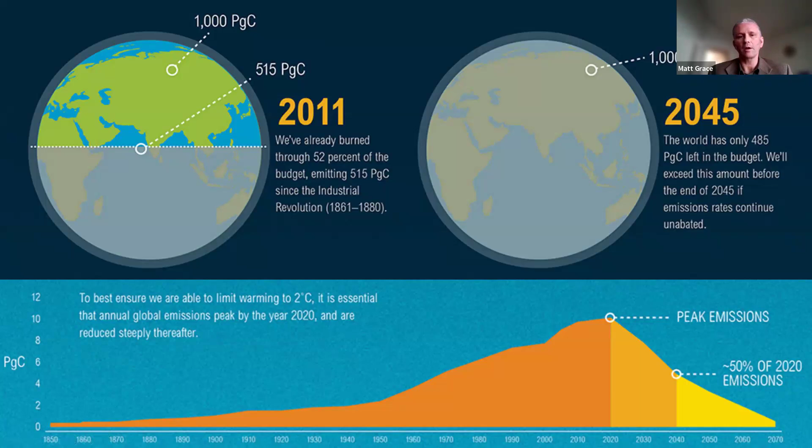Any questions at that point? All right, none so far. Carry on. I'm carrying on.

All right, so hopefully we've now got consensus that we know the common language of sustainability and where that came from. And we just had a refresher on the state of the problem and the need to take action on reducing emissions. But how significant is our industry?

How significant is the construction industry? I did a talk for the International Architects Association a couple of years ago, and I actually started looking into the number of buildings that we have in the world. What we see from this graph, dating back from 2019 — and it was surprisingly difficult to find global figures for this information — is that our floor area has gone up year on year.

We had a little dip there when emissions leveled, but now they've started creeping up again. So the contribution of the built environment is not going down, and the rate of change we're getting from regulatory changes, from new building codes, is a fraction of what we need to do.

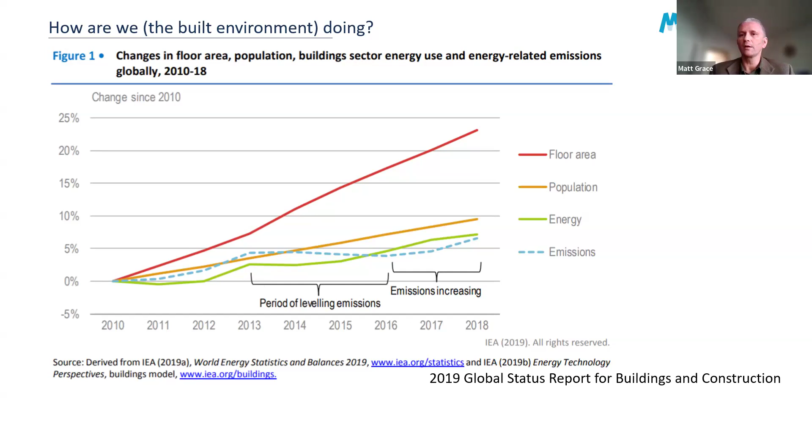So as part of this talk I did on existing buildings — I'm expecting Andrea might be interested in this as well — the best estimate I could come up with was that there were around 1.7 billion buildings in the world. And that was from a little survey they did of just a small proportion. So we've got a huge challenge, and we're very focused on reducing emissions in new buildings. We can't do it without tackling the existing buildings.

Also, when we look a bit closer to home in terms of Canada, what we build now, we're going to be stuck with. So we're not going to build our way out of this by doing new buildings. Around about half of all the buildings that we have will still be in use by 2050. So we'd better do what we can with those. And we're also seeing that we're only replacing the building stock by, at best, 1% a year. So the role of the existing building stock is very, very significant here.

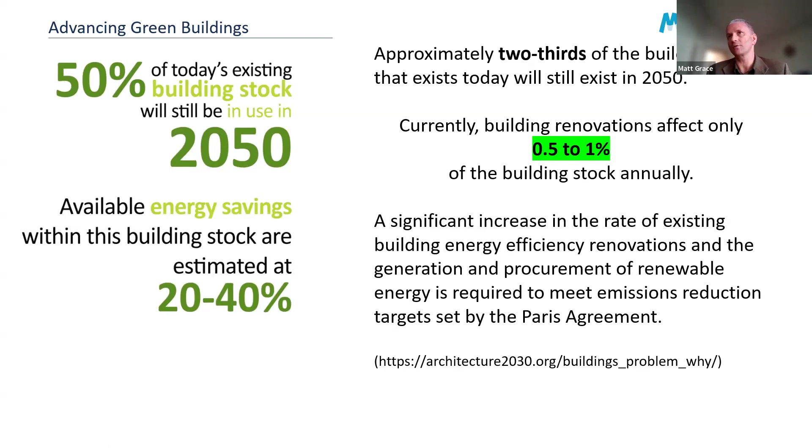I'm also interested in the global piece of the energy and emissions pie of our building sector. This next graph is fairly complicated, but I borrowed it from an energy guru I found through LinkedIn. It might be tricky to read, but I've started to really appreciate Sankey diagrams.

Am I marking this up or not? Let me annotate. Here we go. Yeah, we can see your mouse.

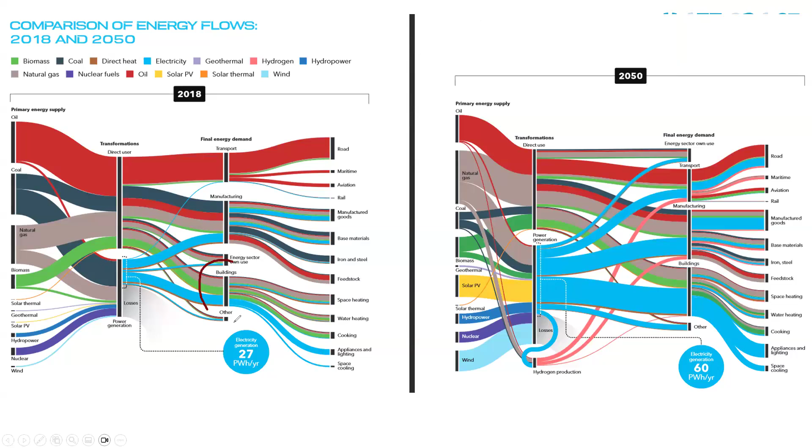This chunk down here is buildings, for 2018. We're seeing that total electrical generation is going to more than double, and the buildings' role is still huge. I've seen estimates globally of the energy and emissions associated with buildings ranging anywhere between 30% and 60%. You could argue it's much higher, because where we choose to locate our buildings and the transportation infrastructure between them impacts the whole transportation section as well. And a lot of the materials we manufacture are for building and maintaining buildings, so I could claim a big chunk of that too for the built environment. I think the role of the built environment is usually understated when you consider the number of different end uses it impacts.

If we're renovating or designing buildings using materials that have to be transported across the world, the transportation impact is going to be significant.

One of the other facts, as an aside - I've been aware of this for a while regarding maritime transportation, but I've seen it circulating recently on social media: around 40% of all ocean-going vessels are transporting fossil fuels. It's a really bizarre system that we're in right now.

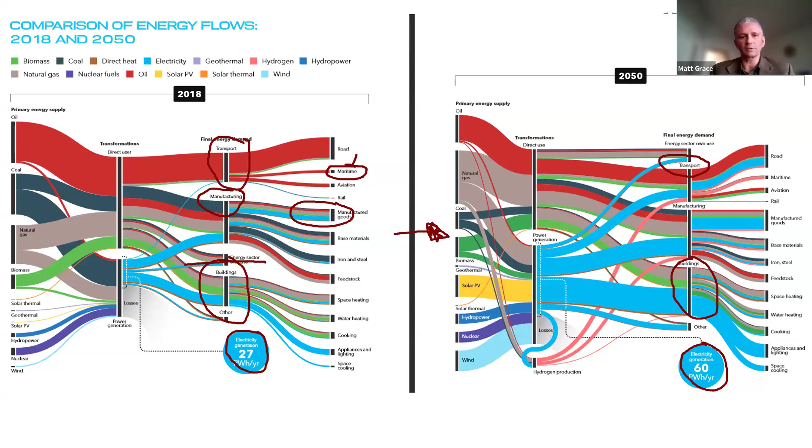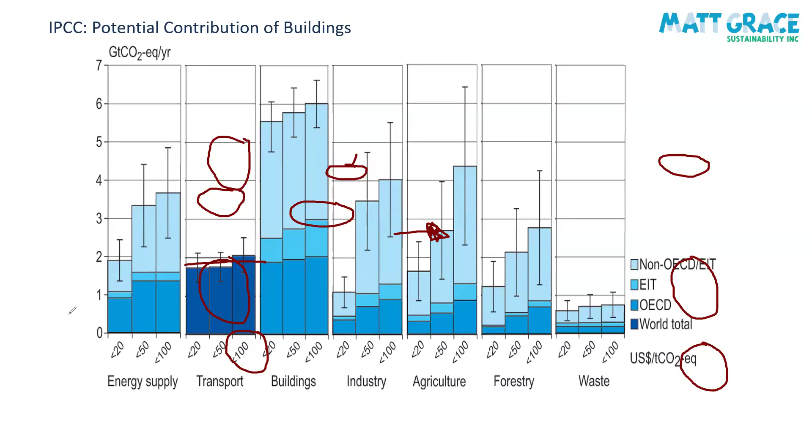The other source I like to reference - oops, how do I get rid of these annotations? Hit the clear annotate button on the annotate bar. Do I just hit that? Oh, there you go, delete all those comments. Look at that. Learning on the job here.

Thanks, Frank. I love this graph because it's not from buildings people. What we have here is global emissions, measured in gigatons of CO2 equivalent per year. I wouldn't worry too much about the different shades on the graph, but what we see is that we're the biggest - so we're number one. Everyone, round of applause there.

So if we did everything else and ignored buildings, just from this graph I think I'm going to claim a chunk of this for us, and probably a chunk of this waste as well, plus materials, which isn't even showing up on this graph. But every way you look, every independent study, buildings is the biggest chunk, the biggest opportunity for savings, and the biggest impact when you take one particular sector. I find it kind of empowering, a little bit intimidating, but it also reinforces our call to arms to tackle this.

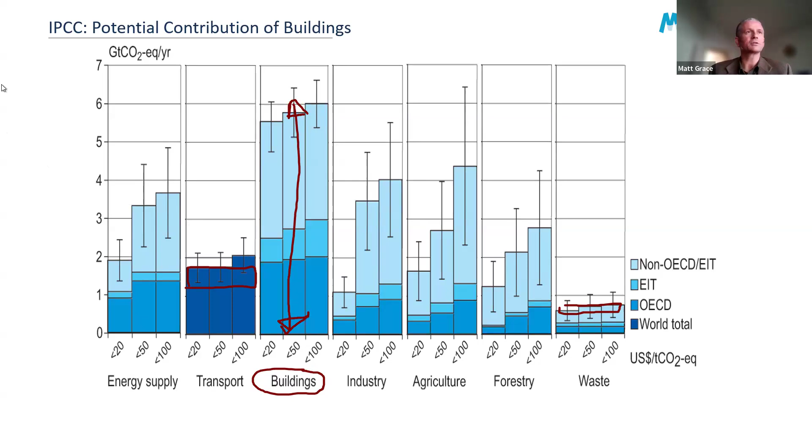Any questions at this point? Okay.

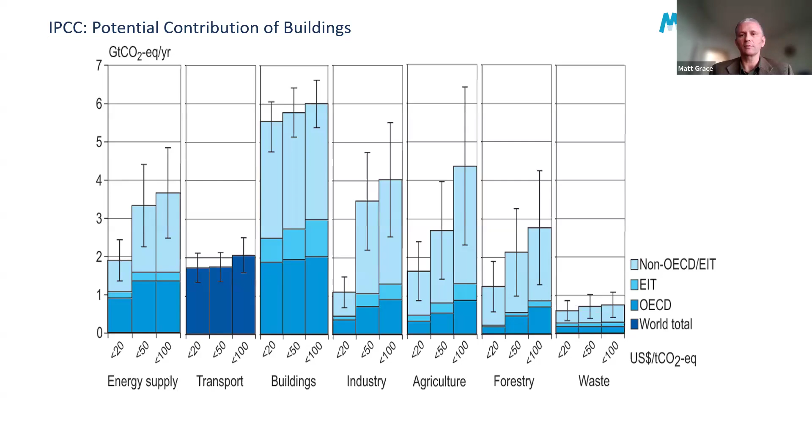All right, so hopefully by now we all agree on a common language of sustainability. We know we've got a big problem - we probably knew that already. We know we have to act in terms of the construction industry. And how do we know if we have a sustainable building?

Let's have a look at that. This is really where all of the frameworks for sustainability, using that term broadly, started - beginning with BREEAM back in the UK. Dave and I both worked with the original authors of BREEAM, and they started to say let's have a global approach to this and try to have a simple framework for what we mean by sustainability in terms of a building.

Can anybody tell me what this graph is showing?

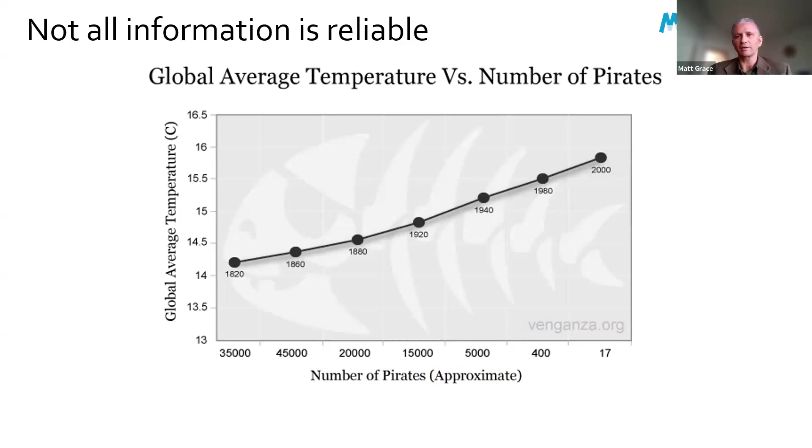I did have a meeting this morning talking about affordable housing. We'll maybe touch on affordable housing here in Calgary. Lee, who I was meeting, said, 'Is that my Hummer outside?' Was it a bit of a joke? It wasn't. I don't have a Hummer.

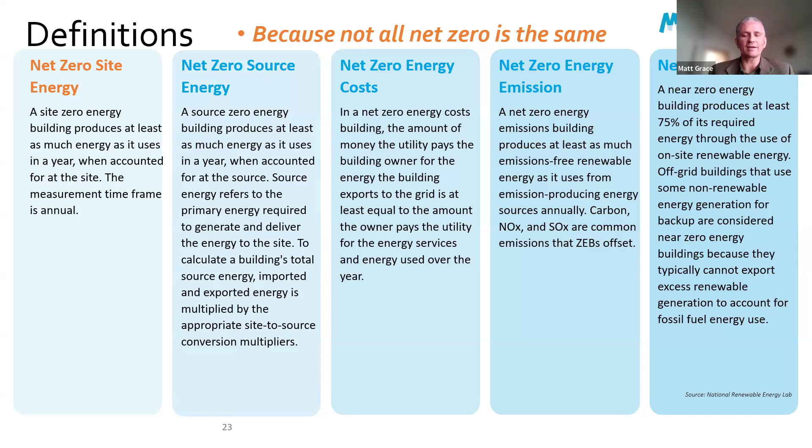Let's start to have buildings that actually contribute more clean energy than they use, that take materials out of landfill or divert them from landfill, that include workforce and labor opportunities for people who might not get them otherwise, and that contribute to clean water as well. All of this is possible. None of the problems we have, the challenges, are technical. We know how to do all of these things.

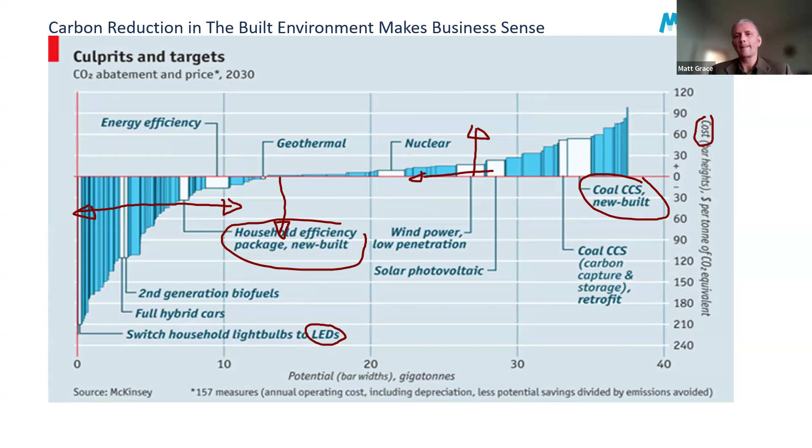A couple of years ago, a colleague and I did a study specifically for Alberta, looking at a few different archetypes. What we found, for net zero, was there was somewhere in the range of a 5 to 10% premium.

The most common pitfall is that when a design team is asked to move towards net zero or net positive, they usually pick out the design they did last time and build from there. A few years back, I had a client who'd moved from the automotive industry into buildings, and after working with him for a few months, he told me the building industry is really backwards, really slow.

When you design a new vehicle, they typically set out all the operating parameters and design performance first - say, carry 5 people and this amount of luggage, go this distance at this speed, with these crash safety ratings. Then the design team designs the car to meet those requirements. He could not believe the practice we typically go through in construction.

He said everyone's pulling out the last thing they did and trying to modify it - basically pulling out a minivan, a soccer mom's minivan, and adding upgrades to try to make it into a Formula One car. He said it's never going to work because you're always adding things but never taking something out.

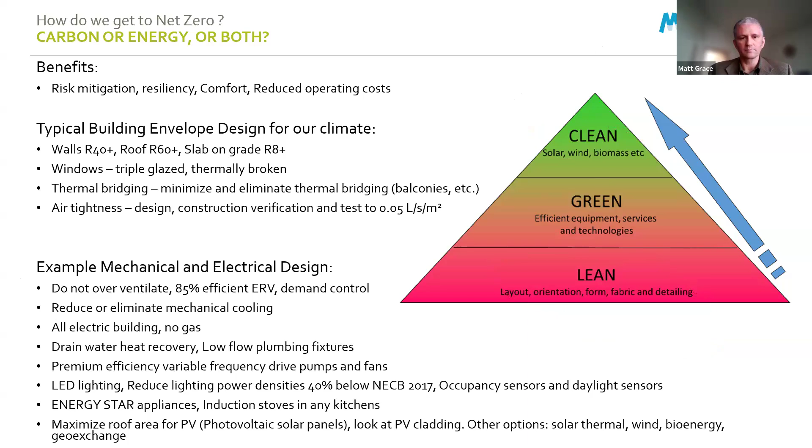So, trends and takeaways. Everyone's done really well, you're onto the final stretch. So can anybody tell me what this is?

The term sustainability has got real meaning, but we've been in danger of using it frivolously and just adding it to everything. In the same way that if you're old enough, you'll remember when suddenly everything became extreme, like extreme ironing. There was a time when MTV was getting big. We could no longer just go mountain biking or roller skating. Everything became extreme. We had extreme in front of everything.

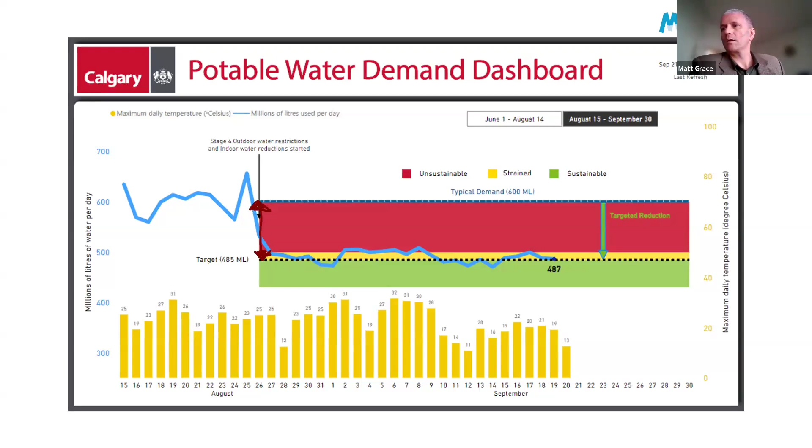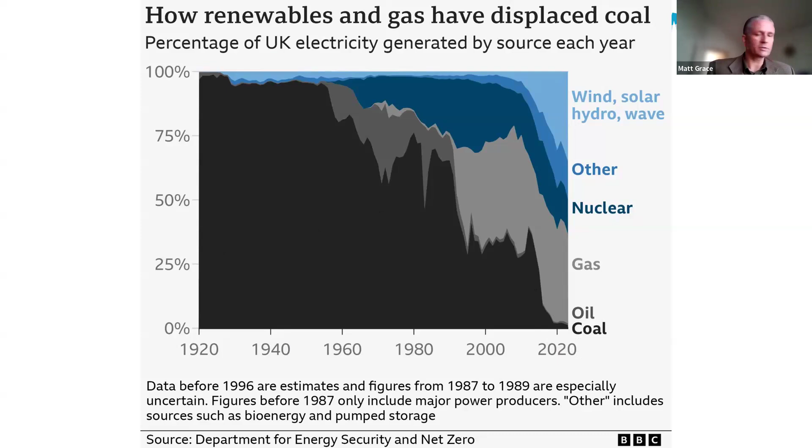And so this has happened just steadily. I didn't contribute to it particularly, but what we're saying is that we can transition, and it is very doable. We're seeing this around the world. So what we've got ahead of us is we've got a model for more sustainable buildings. Good news is it's cost effective. It all interacts with everything else.

So we're coming back to, let's just do a recap here. We're somewhere in the region of 40 to 60% of all of the emissions. We have to change something because it's impacting a lot of problems. We haven't even talked about insurance. You know, we're talking about technical and non-technical problems. When the insurers don't insure your buildings because you haven't addressed the climate hazards—we haven't even talked about climate hazards—you've got a problem.

And then the good news is, just recapping on this, it doesn't cost any extra if you do it properly, and we're not just adding on bells and whistles and doing the eco-bling. Moving towards sustainable net positive buildings that are contributing towards action on climate change is actually helping out. So I've got a little summary of those points there, just to wrap up.

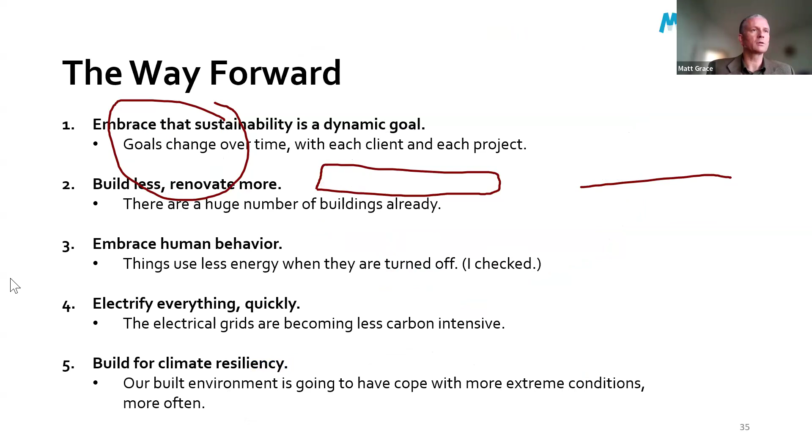Sustainability is a dynamic goal. Just because you designed something one way for one project doesn't mean it's the same for the next. I'll come back to affordable housing - we've got a housing crisis here in Canada, particularly in Alberta. If we build something 5% more costly because it means net zero, but that denies even one family a roof over their head, is that ethical? Is that sustainable? Are we ignoring the people side of things? I don't know.

We've seen the urgency for renovation. It's harder, it takes more thought, there are more barriers, more problems. But this is why we've got such a shift and urgency on emissions neutral buildings and the retrofit accelerator from Alberta EcoTrust.

We build most of our buildings for people, so if you're ignoring the people, then we're not doing our jobs properly. Like I said, things use less energy when they turn them off. Electrification is clearly the way to go - it's not straightforward, but it has to be done.

Lastly, something I found quite incredible. I was working on an institutional building here in Calgary, and the mechanical engineer referenced the appropriate guide from ASHRAE, and the weather file was from 35 years ago. He was designing the mechanical systems to cope with plus 28 in the summer, and that was the code. So he was doing everything per code as he should do, but the codes are not going to help us.